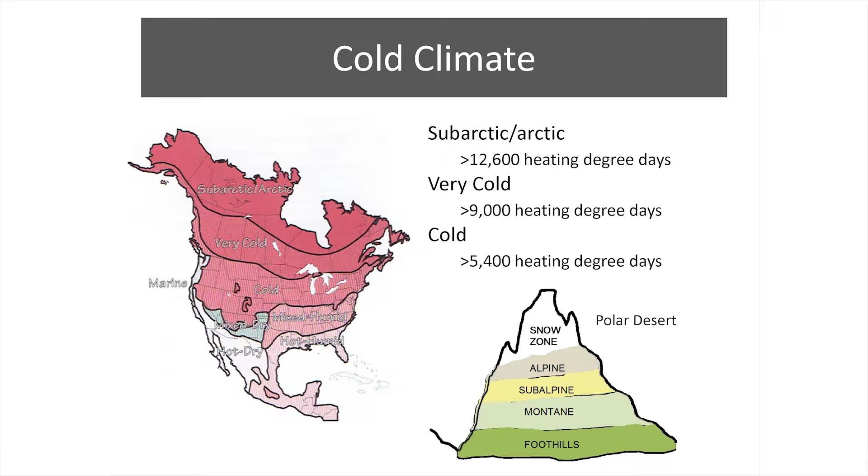So this is a map of North America. I come from a little town in the mountains called Canmore, Alberta, Canada. It's about an hour's drive west of Calgary and about 20 minutes from Banff, just 2 minutes from the Banff Park gates.

It says I'm in a very cold zone and I get 9,000 heating degree days, but actually we get about 7,000 because we're fortunate enough to get Chinook winds that come in the wintertime and warm things up. So one day it might be minus 25 and the next day it's plus 15.

A heating degree day is just one way to define a cold climate. It's a function of how many days are below 18 degrees Celsius, which is the cutoff when you might want to think about putting heat in your buildings. So it's the number of days below 18 degrees Celsius times the number of degrees below 18. For instance, yesterday morning my car said it was minus 12, that's 30 degrees below 18. If it was minus 12 consistently for 10 days, that would be 30 times 10, or 300 heating degree days. So it adds up pretty quick.

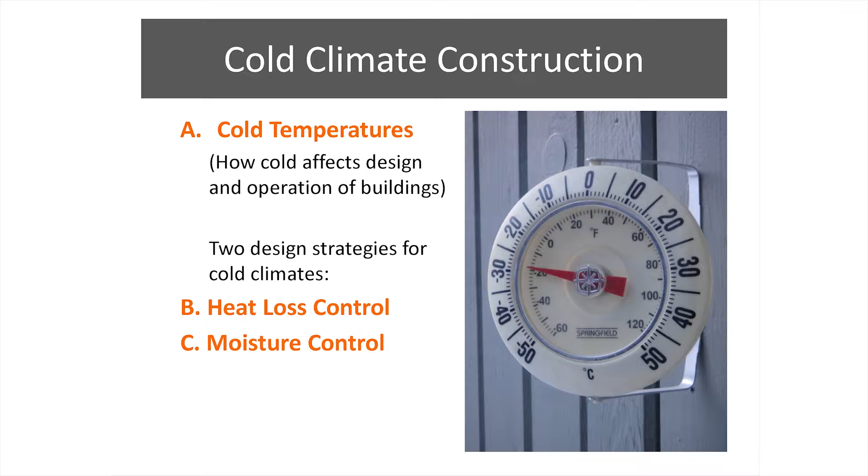So first of all, just temperature in general, what does that mean for the design and construction of buildings? It means our precipitation comes in the frozen form. It means extreme temperature shifts, like the Chinooks I just described, from one day to the next, a 30 or 40 degree shift. It also happens throughout the seasons, so winter minus 40, summer plus 30.

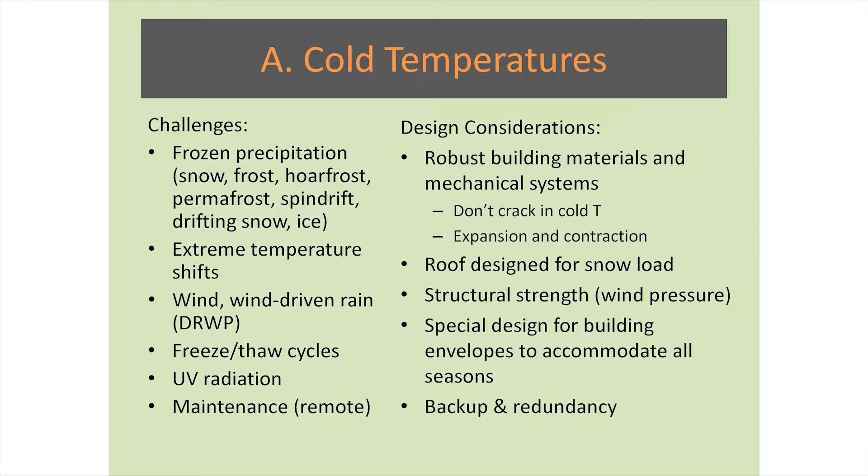Wind can be very strong. We have something called DRWP, driving rain wind pressure, which you have to design for. We have freeze-thaw cycles, UV radiation, and maintenance concerns. Maintenance can be difficult in a cold climate because you don't want to send your maintenance guys up on the roof when it's minus 30, and especially if it's a remote area, it might take a while to get the parts in.

So how do we respond to that? We use robust building materials and mechanical systems, materials that don't crack in cold temperatures, and sealants that will expand and contract with extreme temperature shifts. We design roofs able to take the snow load, using actual snow load tables. Strong buildings, structural strength is important, with special design for building envelopes concerning heat loss and moisture control. And we build backup and redundancy into the systems so that if something breaks down, we can make do until repair can occur.

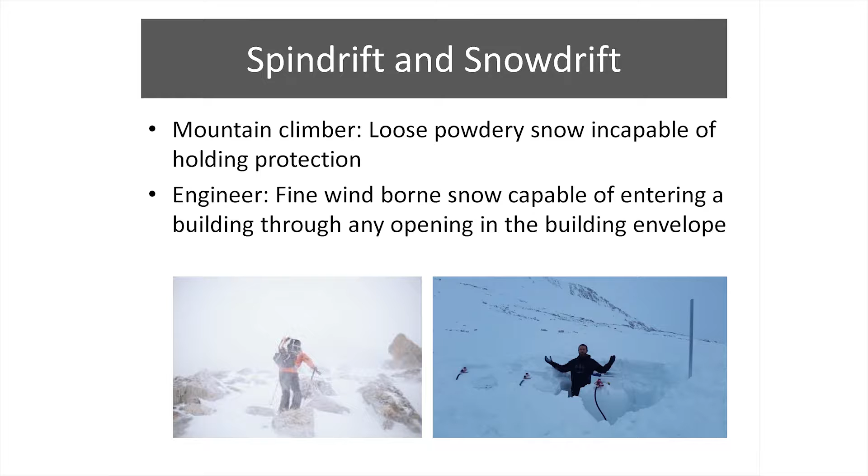A word about spindrift and snowdrift: the definition of spindrift to a mountain climber might be loose powdery snow incapable of holding protection, but to an engineer or architect, it's fine wind-borne snow capable of entering a building through any opening in the building envelope. So we have to design special vent covers for all the vents. Over here on the right is a guy digging out some propane tanks because they've been covered over by snowdrift.

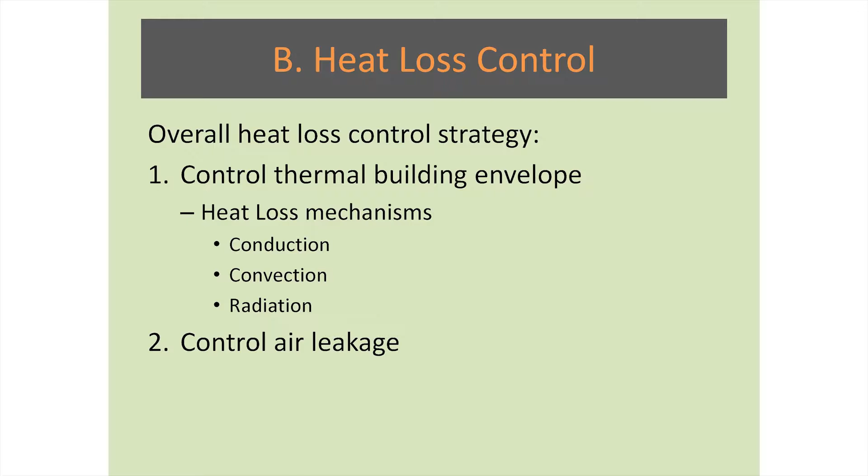So one of the first two cold climate construction strategies is heat loss control. And heat loss happens through the building envelope, through the thermal envelope, so how much insulation you have in there is a factor. And also you need to control air leakage, so I'm going to talk about both those things.

Heat loss mechanisms are conduction, convection, radiation, where conduction is actually the most important one.

Back in 1965, when my dad built our house, the building code stipulated 2x4 exterior walls, which is really 3.5 inches of insulation. And when I started studying architecture back in 1980, the building code stipulated 2x6 exterior walls, so that's actually 5.5 inches of insulation.

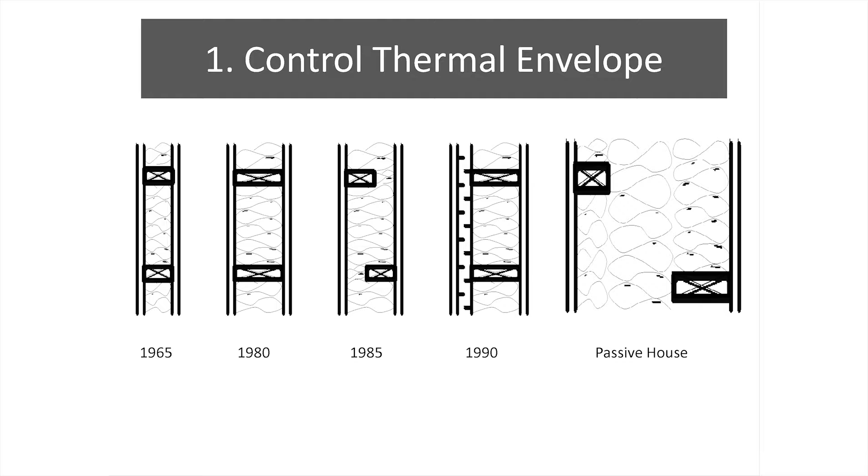Both of these examples, if this is inside and this is outside, this stud here acts like a thermal bridge and it conducts heat out. So that's why we came up with this alternate solution, still a 2x6 plate, but 2x4s are staggered so that we can have some insulation there, which acts as a thermal break.

Nowadays, starting in the 1990s and still now, this is our standard exterior wall. It has an extra 2 inches of rigid insulation on the outside, and that acts as a thermal break here. And you just compare that to the passive house system, which is about 16 inches worth of insulation, which might seem excessive.

But besides conduction, the passive house system, because it's so thick, it also stops heat loss through convection. So that's the magic in passive house.

So I don't know how many people are familiar with passive house, but the theory behind passive house is that it's so well insulated and so airtight that you don't need a furnace. The sun heats it up, people's bodies heat it up, cooking activities, electronics, and there have been thousands of houses built in Europe, Germany and Scandinavia, according to passive house standard.

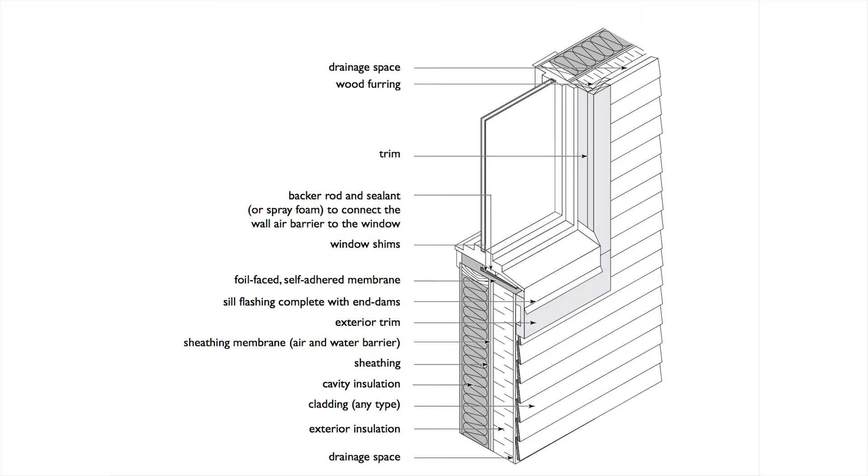So a typical exterior wall in Canada would have 2 layers of insulation. And even the foundation, so we have basements, a lot of us have basements, and the insulation that's on the wall here, there's the first layer and the second layer. This one is actually carried all the way down to insulate the foundation wall.

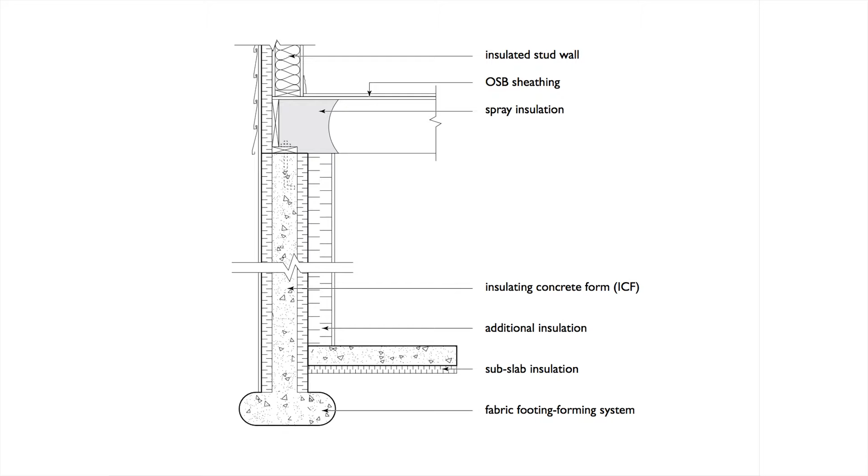And what this does is it keeps this surface here, so the inside surface of the concrete foundation wall, it keeps that surface warmer. And so there's less risk of condensation there. And also you can see there's insulation under the slab.

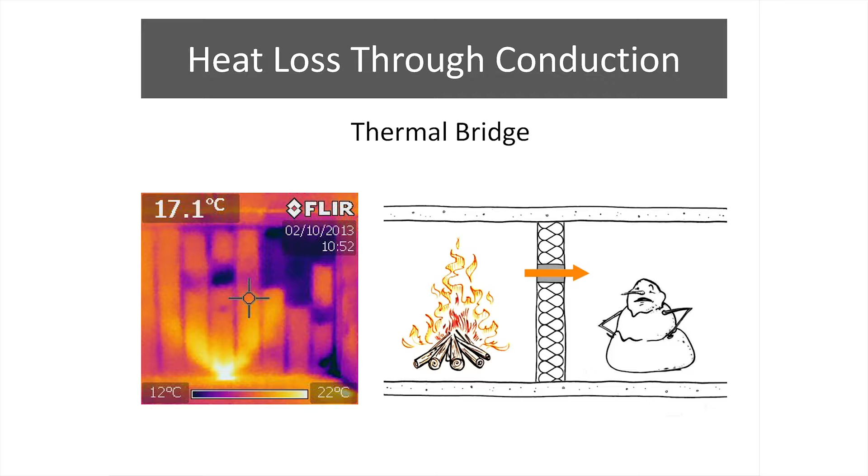This image, you can see vertical lines. It's just when you're looking at it with the visual eye, all you see is just the drywall. But this image shows you that in behind the drywall are the studs. You can see the studs going up and down, and those are actually colder than the insulation that's in between. And this image also showed me that there was some insulation missing in this wall.

And so heat flows from hot to cold. Okay, that's just a building science principle. And I remember back when I was a kid, if I just took too long to get in the house and close the door behind me in the wintertime, my mom would say, 'Karen, close that door. Do you want a warm-up Maidstone?' And I thought that was kind of funny because I thought surely it's the cold air that's coming in. But no, she was right. It's actually the warm air that's going out.

The way this happens is there's warm, moist air inside, and it hits that wall. Along where all the studs are, it's just a wee bit colder, so moisture tends to condense along those lines. Dust in the air sticks to that, and when the moisture dries up, you're left with dust marks. So what do we do?

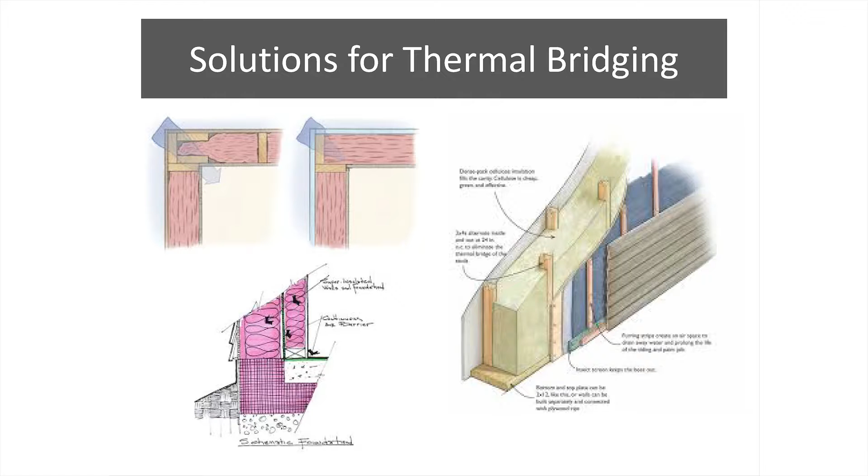Solutions for thermal bridging: we used to put a lot of framework in corners, but now we don't do that anymore, so there's less thermal bridging there. We also add two layers of insulation, and sometimes we can make it thicker and stagger the studs. Those are things we do to prevent thermal bridging.

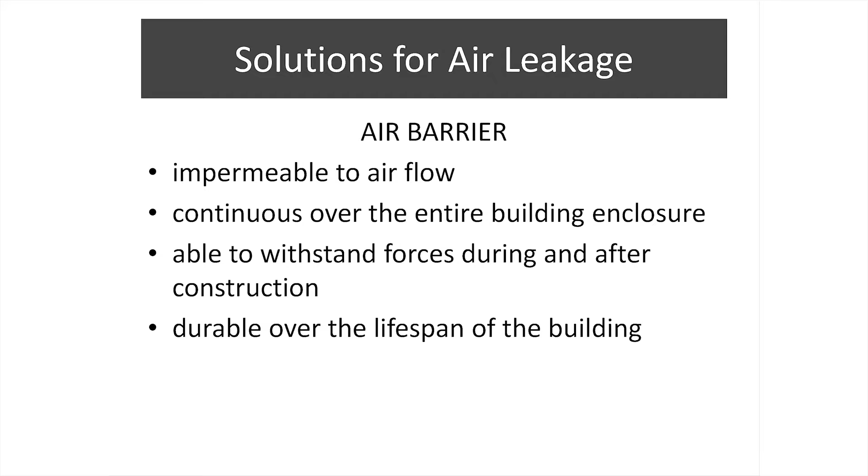In Canada, the air barrier is also the vapor barrier, and it's installed on the warm side of the insulation, and it must be continuous. So even when there's some kind of penetration, like a light fixture, the air barrier still has to go around that.

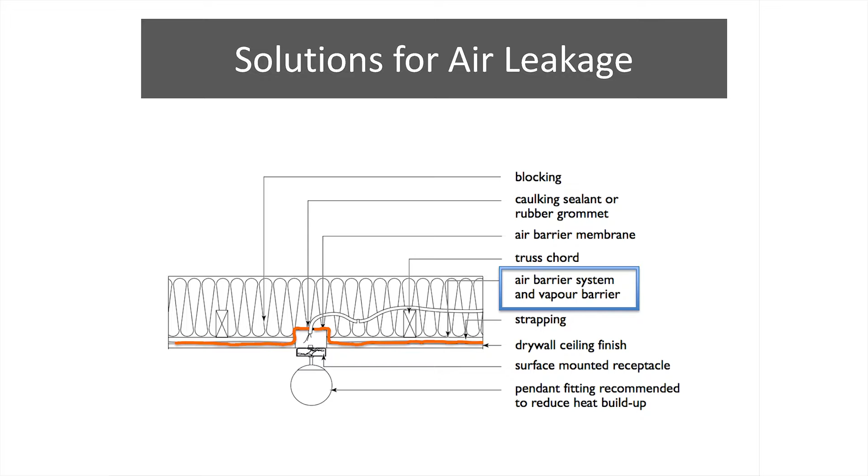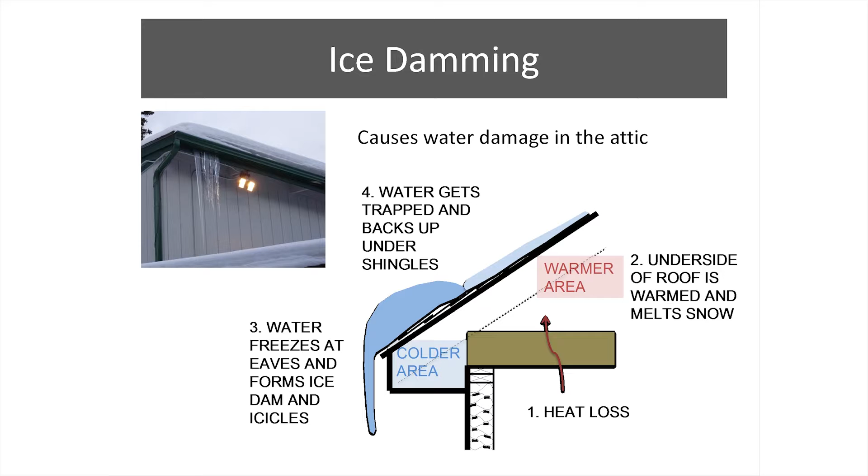If we don't succeed, we could get something called ice damming, which the symptom of that is icicles forming. It looks kind of cool, but it's not a good thing because it can cause water damage in the attic, structural damage, and mold can grow, which can lead to health issues.

The mechanism of how that happens is there's heat loss into the attic, so we have a warmer area which melts the snow on the roof. As that drains down the roof, it hits a colder area near the eaves and starts to freeze again, forming icicles, but this also forms a dam. The water flowing down can't go anywhere, so it starts to back up under the shingles and then drips down into the attic.

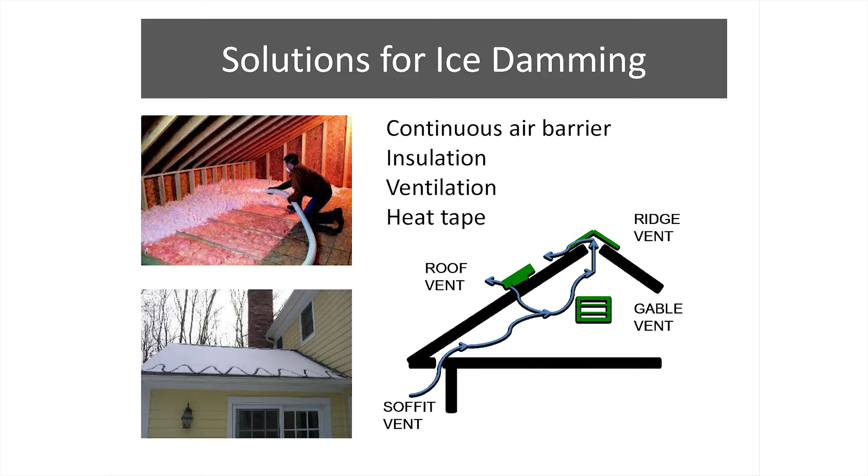Solutions for ice damming: make sure there's a continuous air barrier, add more insulation in the attic to keep it cold, and provide ventilation—soffit vent, gable vent, roof vent, ridge vent. In a pinch, you could put in heat tape, which keeps the eave area warmer so the water keeps draining.

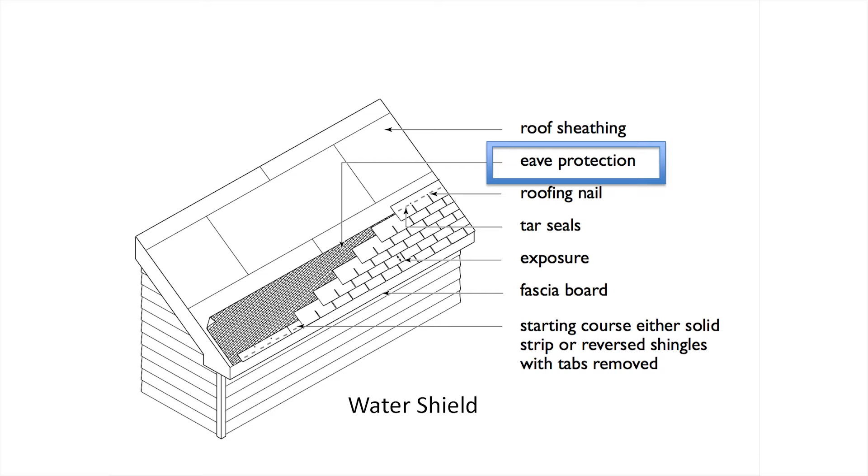In Canada we have something called a water shield—it's eave protection and a building code requirement. So if there is any backup under the shingles, there's a secondary shield there to make sure water does not go into the attic.

Finally, moisture control. The overall moisture control strategy in cold climates is to make sure that the moisture generated indoors does not enter the building envelope. And if it does, and some might and probably will, to make sure you've provided a means for it to dry to the exterior. So we put an exterior sheathing on that is vapor permeable.

Just a word about condensation: it can happen on windows, on drywall causing mold to grow, and also on the interior surface of the exterior sheathing. That means moisture gets through the vapor barrier and past the insulation, then finds a secondary condensing surface on the inside of the exterior sheathing.

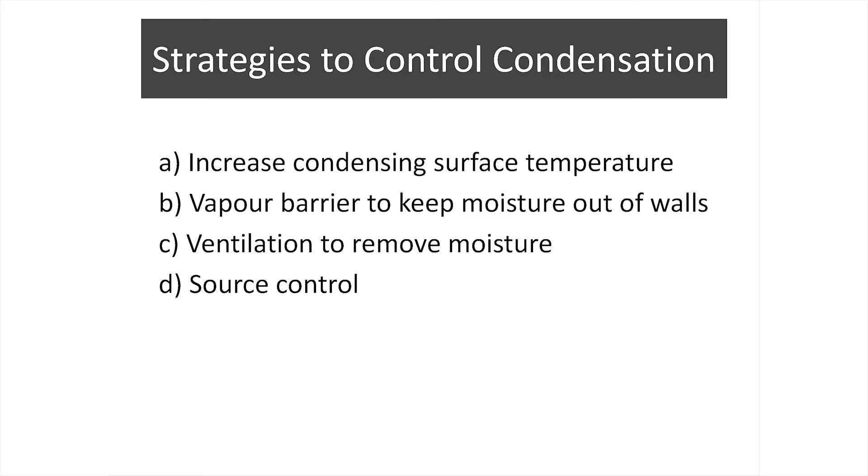Strategies to control condensation are to increase the condensing surface temperature, provide a vapor barrier, provide ventilation, and of course source control.

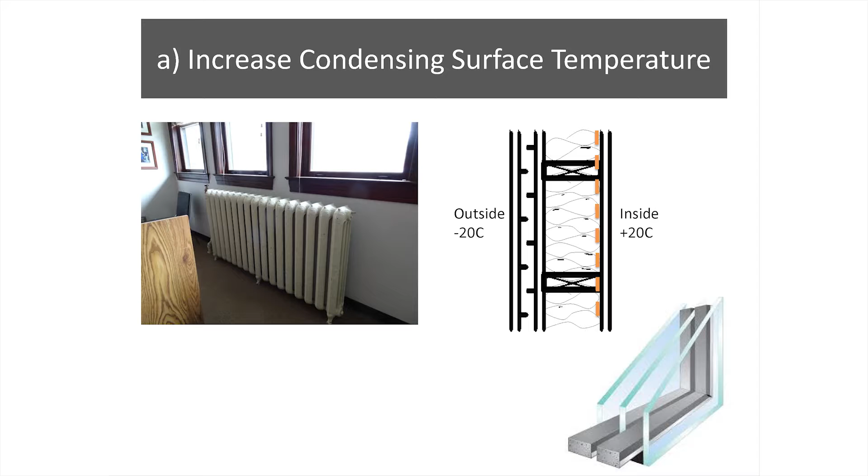To increase the condensing surface temperature, we usually put a heat source under windows. That's why you'll find, with forced air systems, a register right under the windows—it keeps that window surface warmer.

We also use triple glazing. For decades we've had double glazing, but newer homes are now going for triple glazing. There's also the extra layer of insulation we're putting on the exterior now, which keeps this surface warmer—this is a secondary condensing surface, the inside surface of the exterior sheathing. We provide a vapor barrier on the warm side of the insulation, and it must be continuous.

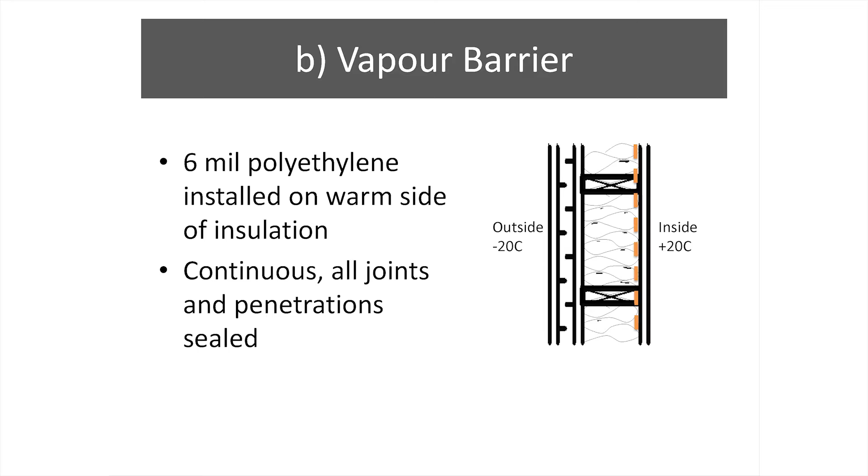We provide ventilation, and in Canada, most of the newer homes and buildings are providing heat recovery ventilation. What that means is the warm air being exhausted passes by the incoming fresh air, which is also very cold. They don't actually mix, but there's heat recovery from that outgoing exhaust air, so your furnace doesn't have to work as hard. It's an energy-saving feature.

And of course, source control - just controlling how much moisture is being produced indoors through cooking, showering, and laundry.

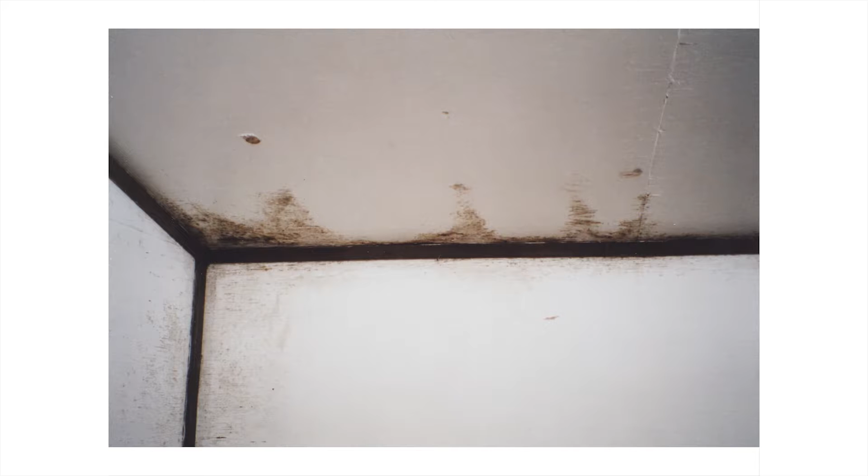About 15 years ago, there was a problem with condensation in the sleeping quarters. It looked something like that. The maintenance guys had been going up every year with bleach, trying to clean that off, but mold has roots, and it just grows back again.

So they brought me up there to take a look. We opened up some of the panels, took a look inside the wall, and were relieved to find that the moisture had not penetrated the wall cavity. So the recommendation was just to replace the plywood and open up the space, because the sleeping area had been compartmentalized into four different rooms. We opened it up so it had room to breathe a little bit.

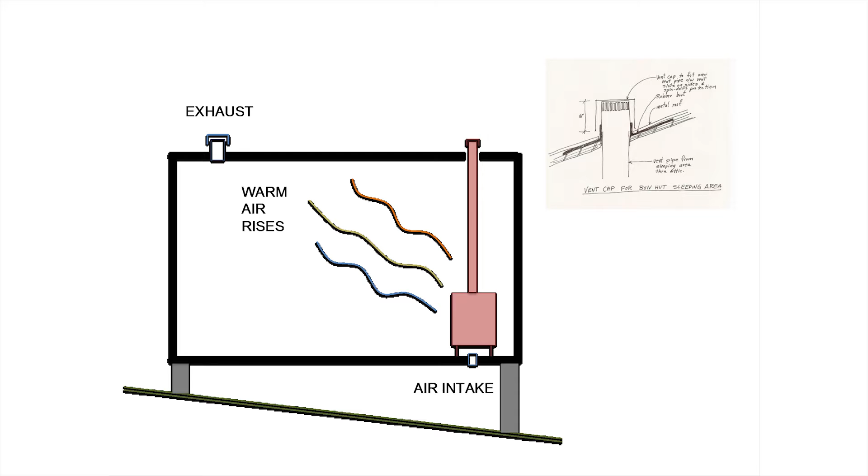And we provided a heat source - there was already a wood stove in that spot. To prevent condensation, you require two things: a heat source and ventilation. There's no energy source up there, so what we did was just pop in a little exhaust vent, relying on the principle that warm air rises.

Some fresh air comes in to feed the wood stove. Warm air rises, takes the moisture with it, and out it goes. Not a very technical concept - it's actually called the Eskimo snow hole technique. But we had to put a special vent cap on that to prevent spin drift from entering.

Another example, the old Lawrence Grassi Hut - that's a clue, the old Lawrence Grassi Hut - up near Mount Clemenceau, the fourth highest mountain in the Canadian Rockies. There were reports of mold and condensation on the inside of the walls. It's a Quonset style with corrugated steel cladding.

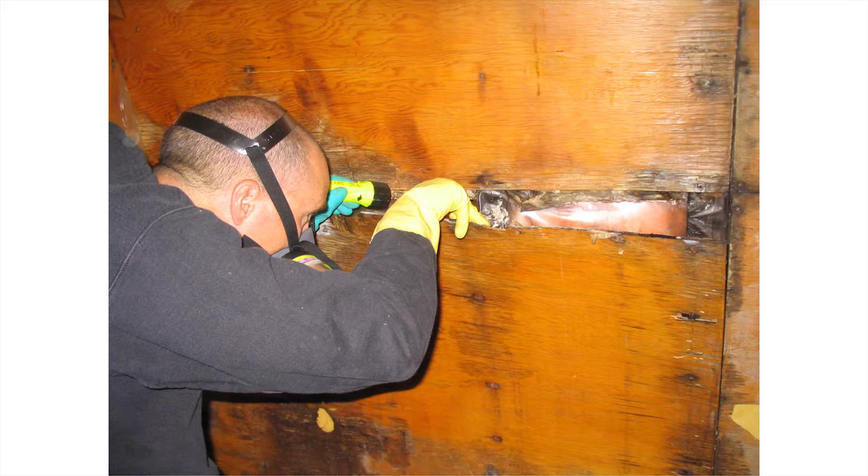When we took a look at it, we opened up the wall cavity and found that moisture had penetrated - in fact, the structure, the wood laminated beams, were soft. Derek could actually just put a screwdriver into it and it sunk right in. Not structurally sound.

The moisture could have gotten in because marmots were also getting into this hut and destroyed the vapor barrier. So the moisture produced inside the hut could have gotten past that vapor barrier into the wall cavity. It could have been through wind-driven rain because of the style and design, or because sometimes this hut is just buried in snow. But for whatever reason, it was decommissioned.

All right, so that's cold climate construction. And honestly, there are books written on this and courses you can take, so 20 minutes hardly does it justice.

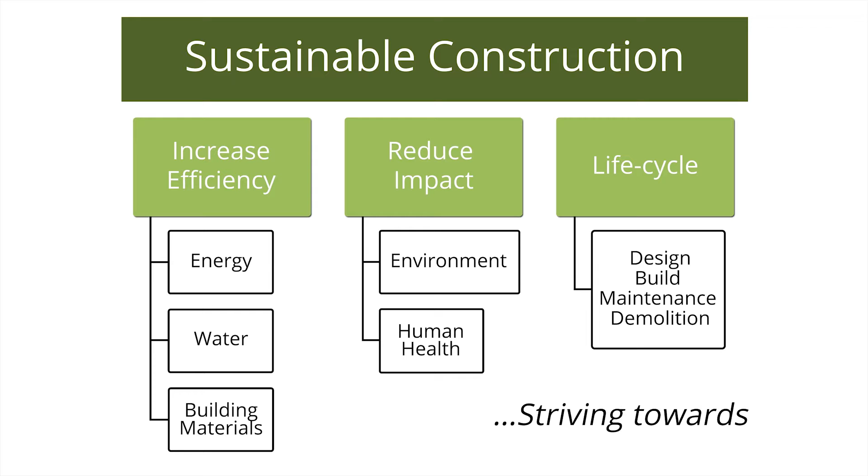Moving on to sustainable construction. Sustainable construction requires increased efficiency - in energy, water, building materials - you're looking at increasing efficiency. It's about reducing impact on the environment and human health, over the whole life cycle of the building through design, build, maintenance, and demolition. We're always striving towards sustainable construction, so there's never a perfect sustainable building, but we're picking and choosing features that are appropriate for whatever you're doing there.

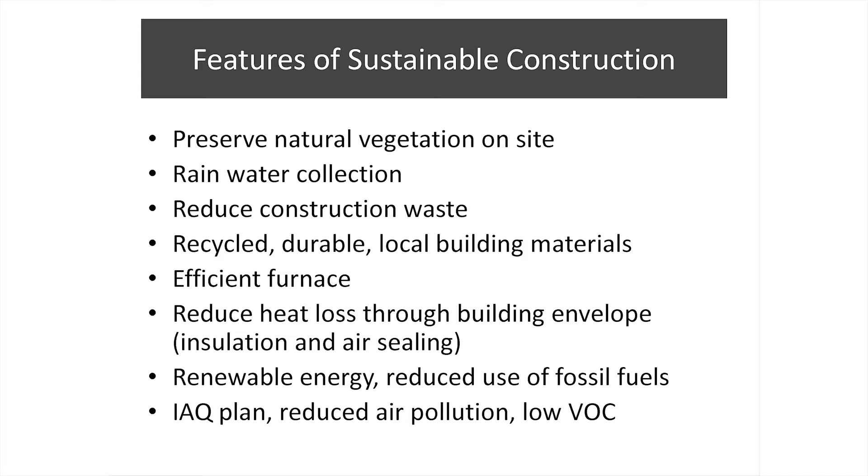You can also look at it as having people priorities, building priorities, and environmental priorities. Some features, to give you a feel for sustainable construction: preserving natural vegetation on the site, rainwater collection, reducing construction waste, using recycled, durable, local building materials, an efficient furnace, reducing heat loss through the building envelope, a renewable energy system, and attention to indoor air quality.

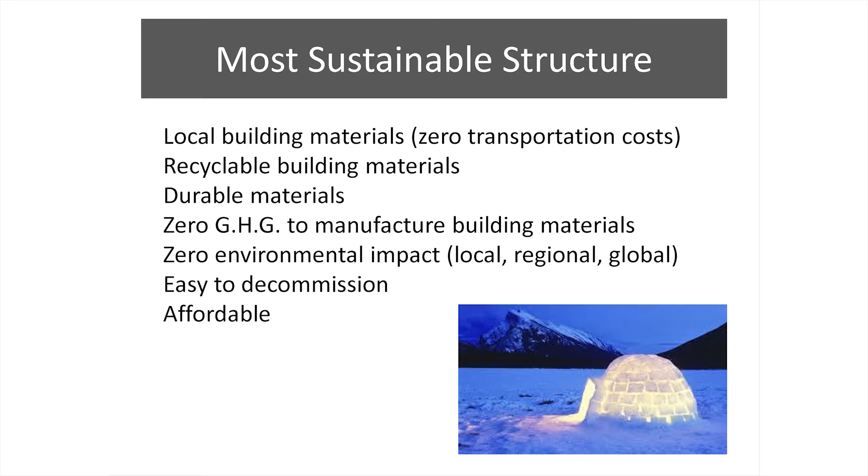So probably the most sustainable building would be an igloo, right? It uses local building materials, zero transportation costs, recyclable building materials, durable materials, zero greenhouse gases to manufacture the building materials, zero environmental impact, easy to decommission, and affordable.

But not very comfortable. It's a safe place, rather than just sleeping out in the outdoors, but not exactly comfortable. So back in 2009, I got a phone call from an architect out of Vancouver, and he'd been looking at the Bees website, and he liked what he saw.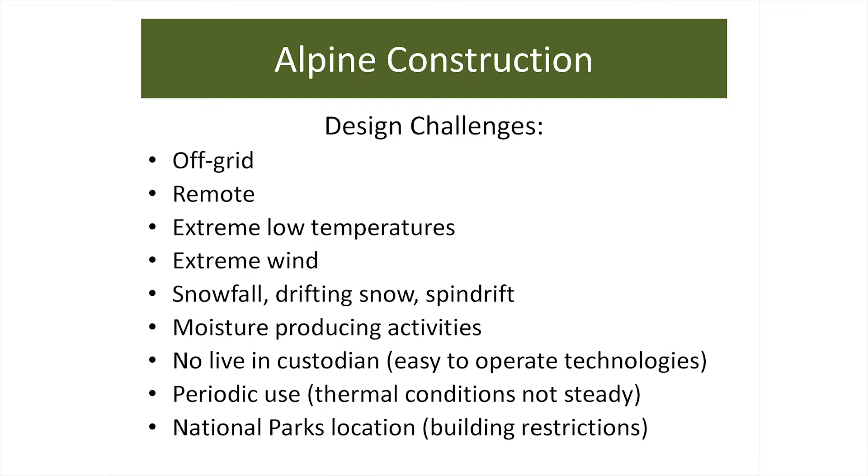He was interested in off-grid construction, and he asked if he could volunteer. And I said yes. In fact, it was good timing because the Alpine Club of Canada and Parks Canada were just in negotiation about putting up another hut on the Wapta ice fields.

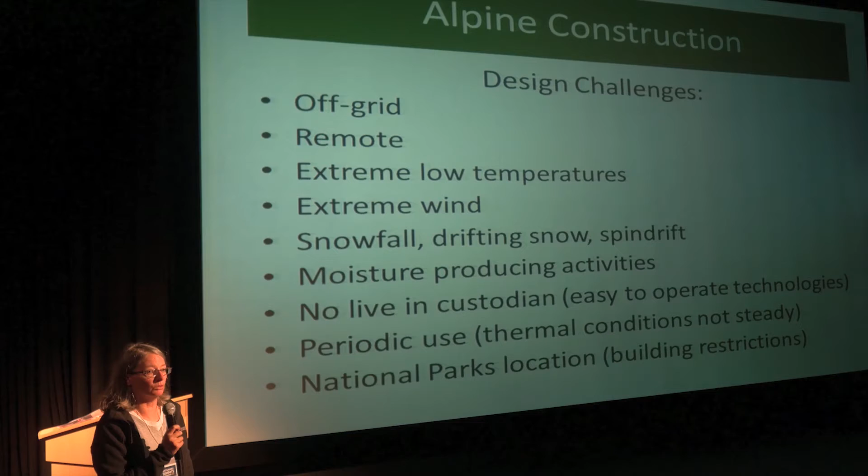How would we prevent condensation? Because all the other Wapta huts had some kind of condensation issue. What could we do differently? What would be the ideal design?

Our design challenges included that it was off-grid, so that meant no power lines, no sewer, no potable water. It was remote, so we wanted to build redundancy into the system and make it easy to operate. Extreme low temperatures, extreme wind. Actually, we did a wind study up there for a year.

We got heavy snowfall up there, drifting snow. Actually, that drifting snow that you saw earlier on, that was up at this site. Spin drift, moisture-producing activities, no live-in custodian, so very similar to what you have in New Zealand here, but not similar to what you have in Europe, where you have these big refuges?

Well, yeah, that - where there's actually somebody there to take care of the systems and monitor that. So we don't have that usually. Periodic use, so you have somebody in there and then nobody there for 5 days or 10 days, and then the hut cools down, and then somebody's back again. So there's a lot of thermal change in that hut, and it has to accommodate that.

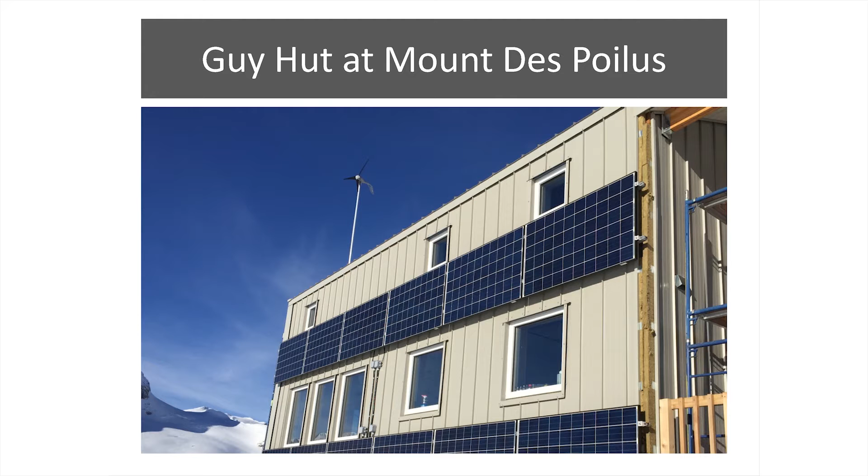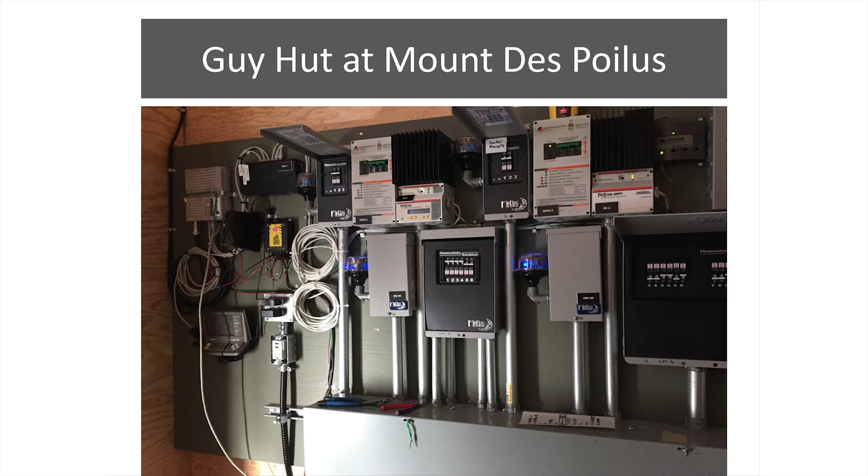And then we put on some solar panels, and there's one wind turbine, which feeds a battery bank, which runs LED lights and some ventilation fans. Electrical, $10,000 worth of batteries, propane burners in the kitchen.

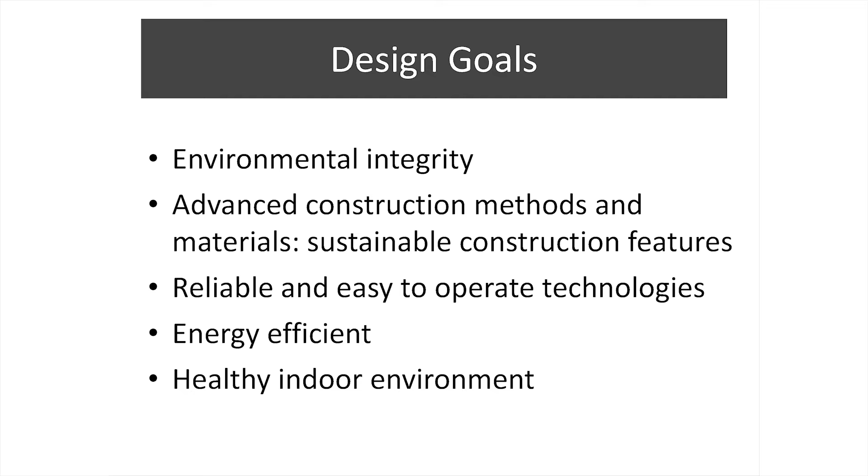Our vision was to build a structure that enhanced visitor experience and acts as a model for other off-grid facilities. It's kind of a lofty vision. We had design goals: environmental integrity, advanced construction methods, reliability, reliable and easy to operate technologies, energy efficiency, and healthy indoor environment. You can put it all together in a nice graph with the vision in the middle and the goals on the outside, and the way we achieve those goals.

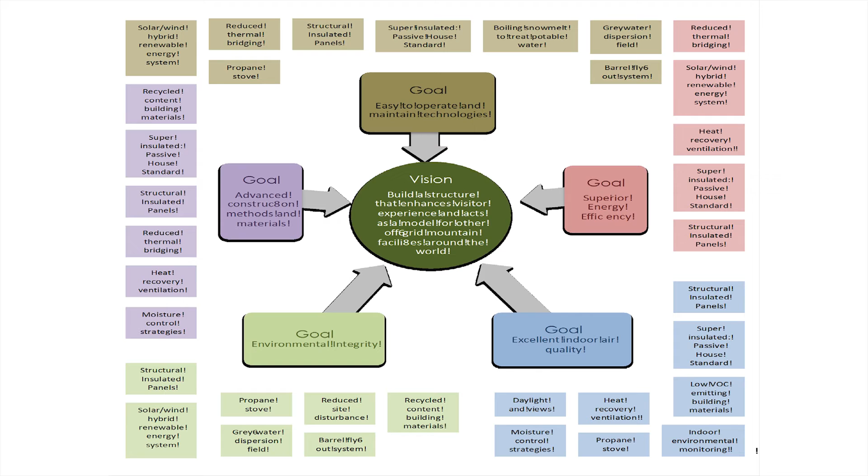A lot of these things are actually repeated. So you can see structural insulated panels. This was a goal for easy to operate technology, and it was also an advanced construction feature, and it also satisfied our goal of environmental integrity and indoor air quality. Sustainable construction features included consideration for ecology and integrity.

So it's a winter use hut only. The goat that you saw, there's also grizzlies that frequent the area. So Parks Canada didn't want us to be using that hut in the summertime, so it's winter use only. We expect about 700 visitors a year, so it's not going to be used a lot.

We had gray water treatment, low visual impact, construction waste management, energy efficient building envelope. Heat was primarily from the sun, so 80 to 90%, because it's so well insulated and so airtight. So we can get away with the heat being supplied mostly from the sun.

We use propane because it burns cleaner than wood burning. We have a renewable energy system, and human waste is removed from the site entirely, which is what the Alpine Club does generally for their huts. Everything's collected in barrels and removed from the site.

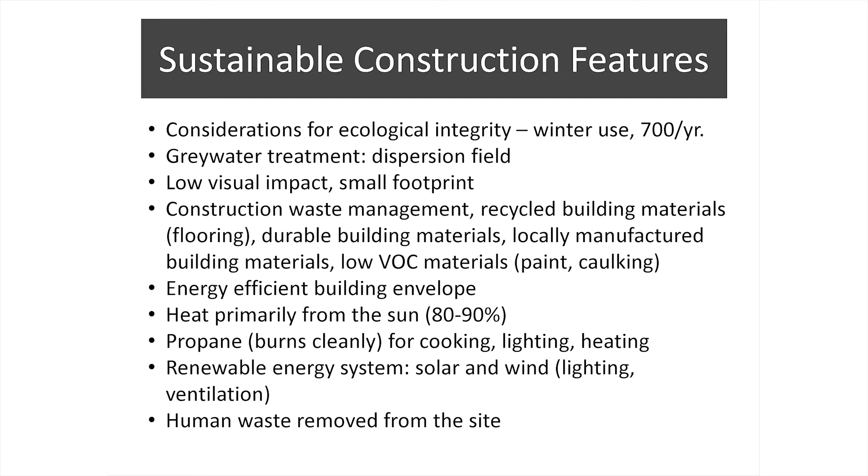Heating is the sun and the propane. Ventilation is provided by fans that remove the moisture, but in a pinch, if that broke down, you could always open a window.

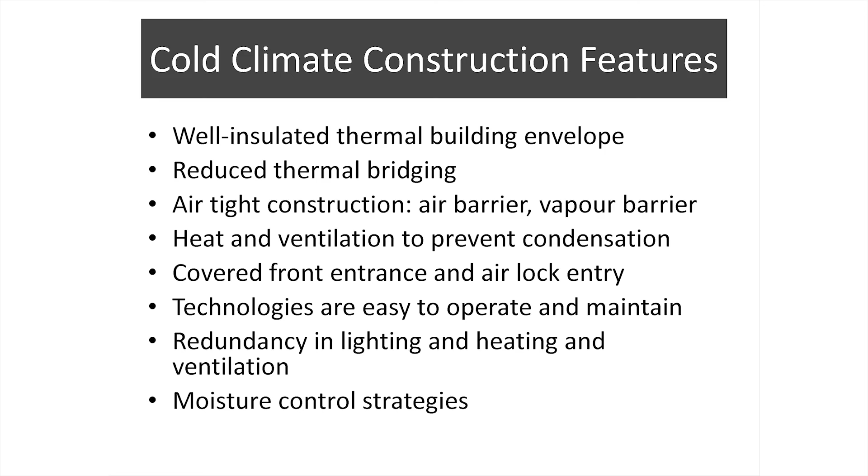Moisture control strategies included heat, ventilation, super insulation, minimal thermal bridging. We kept the furnishings away from the exterior walls. I've seen in some huts where the mattress provided in the sleeping areas is right up against the exterior wall, and if you lift that away, sometimes there's condensation that happens, and mold can develop. The reason that happens is because that mattress acts like insulation, keeping the warm air from inside away from that surface of the exterior wall.

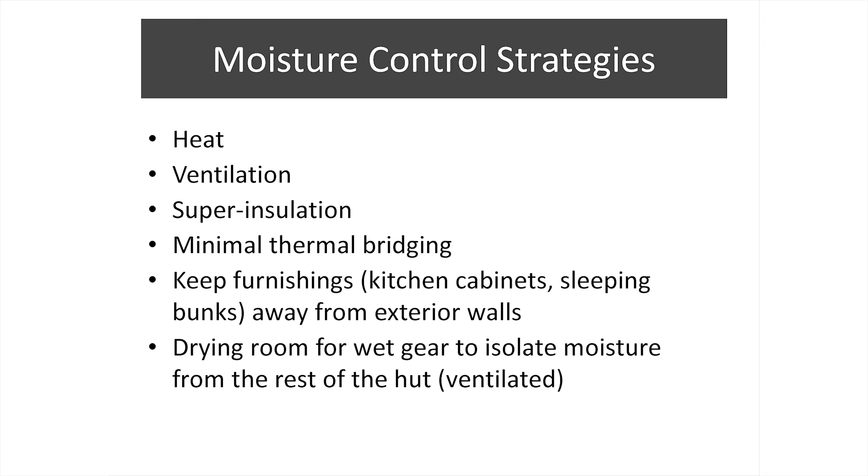So this is where the Des Poilus hut fits. It has about R45 walls, a little bit less than Passive House, which starts at about 50 but goes up from there. So pretty good insulation.

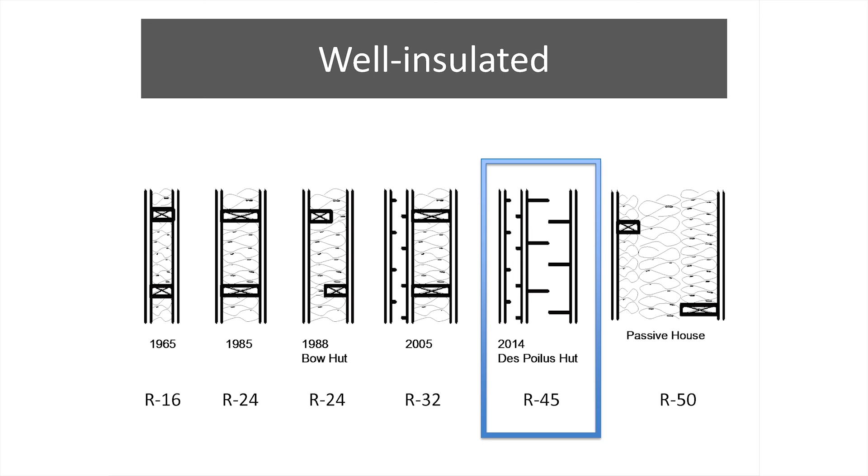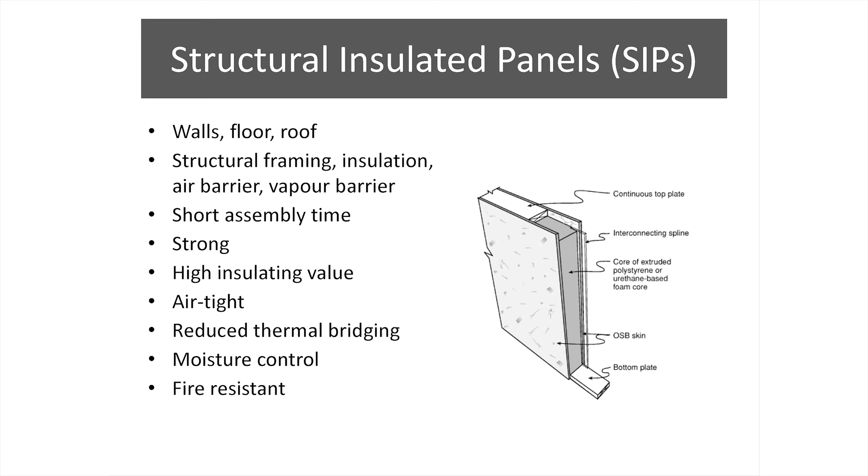Another one of its main features is the SIP panels, the structural insulated panels, which are on the floors, the wall, and the roof. They are structural, insulation, air barrier, and vapor barrier all in one. The reason we picked them for the most part is for the short assembly time, because it's a remote environment, and weather can set in as it did, and we wanted it to go up fast. They're strong, high insulating value, airtight, reduced thermal bridging, moisture control, and fire resistant.

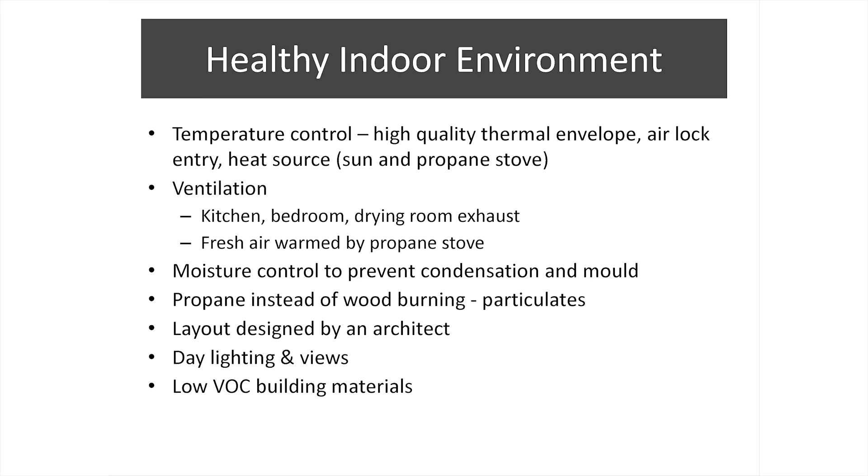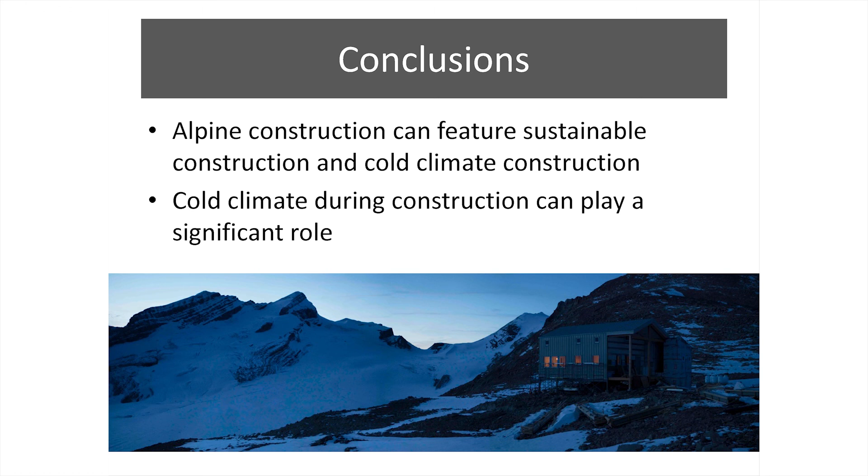I just wanted to point out some of the resources that I found really useful. Cold Climate Housing Research Center out of Fairbanks, Alaska - Golden, that's a golden website. So if you're interested in cold climate construction, they have a whole lot of research and papers, and you could spend a month in there.

ASHRAE, American Society of Heating, Refrigerating, and Air Conditioning Engineers, they actually write the code for ventilation. They just produced a cold climate building design guide published this year, so really good resource. Builder's Guide to Cold Climates by Joseph Lstiburek, the Bible, okay? You need one of those. Canadian Centre for Housing Technology was useful, and I also like the CMHC, Canada Mortgage and Housing, wood frame house construction, because at the end of each chapter it had some sustainable building features.